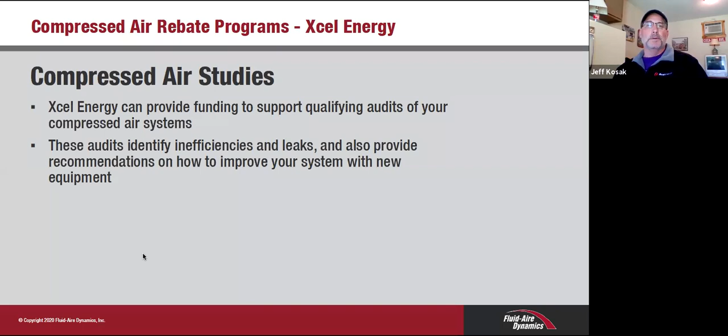Well, that's very helpful. Thanks for giving us a bit of background. Andrew, do you want to briefly introduce yourself and give a little background on what you do for Xcel? Yeah, I'm the engineer that works on the compressed air program. So I'll review all of the study contents and then create the custom rebate analyses. So we file those with the state so they can get audited. We're usually pretty accurate on those, and those are used to determine the KW savings that we'll rebate on for custom, and then also maintain all of the prescriptive rebates that we offer.

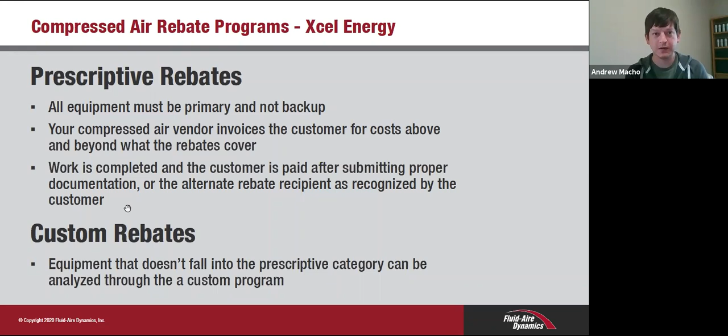Thanks for that. Yeah, you've been very helpful on some of the programs that we have worked together on to date. So looking forward to getting involved in some more of those going forward.

Just to touch on this slide here, there's two different programs available. We have the prescriptive rebates, and I'll let Jeff and Andrew give us some more detail on that in a minute. One of the big things on that is that all the equipment must be primary and not backup. So you can't get a rebate on a backup compressor. Is that correct, Jeff? Am I stating that correctly? That is correct. So that's what that means is if you use a compressor primarily or just only for backup, it's not your main compressor that's carrying the load, that would not qualify.

Your compressed air vendor invoices the customer for costs above and beyond what the rebates cover. So what that means is, in the case of Fluid-Aire, we're taking on the risk there on the prescriptive program. It would be deducted directly from what we charge you for the compressor upgrade. And then the work is completed and the customer is paid after submitting proper documentation, or the alternate, a rebate recipient is recognized by the customer. And then the custom rebates, that's for equipment that's over and above 50 horsepower. Anything 50 horsepower and up would fall into the custom rebate program. Anything more that you want to add to that, Jeff?

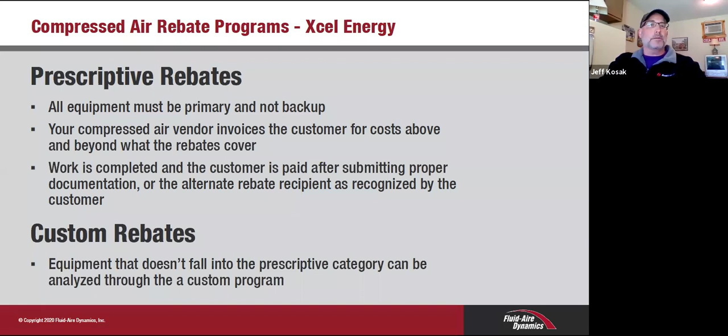Yeah, that's good. Thanks. That really helps clarify those two different programs.

Under the prescriptive program, there's the early retirement program for VSD compressors. If you have an existing fixed speed compressor, you can essentially get cash for that, which is a pretty cool program. There's $100 per horsepower, which applies to any VSD compressor under 50 horsepower, and on top of that, there's the $3,000 early retirement rebate. By retiring that existing compressor, meaning you take it out of service and document that it's been removed, you can get $3,000 towards the purchase of a new VSD compressor from Xcel.

Replacements of working in-service compressors with new factory compressors from 10 to 49 horsepower, so it's rounded up—any increments under that are rounded up to the next horsepower. The existing system must consist of a single rotary compressor unit serving on a common header. The existing compressor may be equal to or greater than 20 horsepower higher than the replacement compressor. Piston compressors are not eligible—so if you've got an older reciprocating type compressor, that does not qualify.

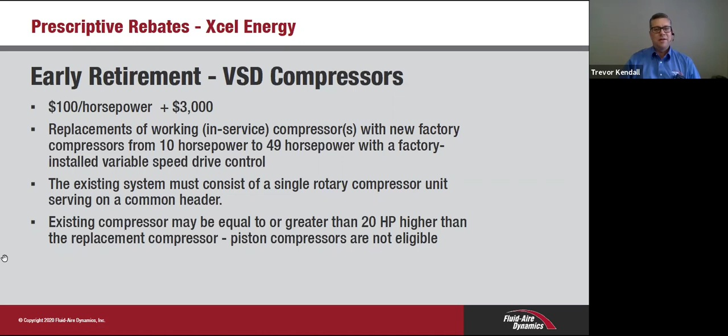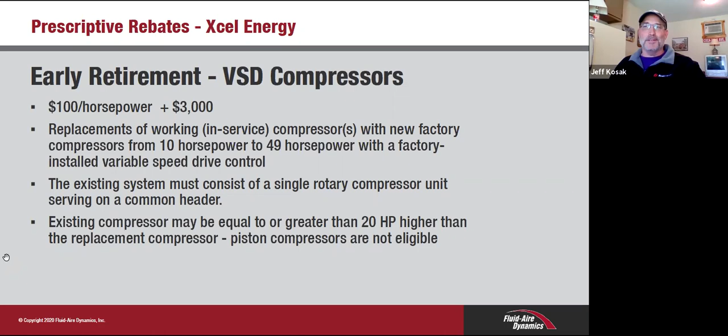Jeff, you could probably speak a little bit more to that, what's entailed there. I'm going to hand the baton over to Andrew on that one. He's got probably a little more control over that part.

On this early retirement and the horsepower reduction, that $3,000 bonus just has pretty specific requirements on the equipment in place—that it is pretty inefficient and there will be a large amount of savings seen from upgrading. Otherwise, it's just the standard $100 per horsepower, which is a new comparison saying you have these two options, but you're going with the VSD option.

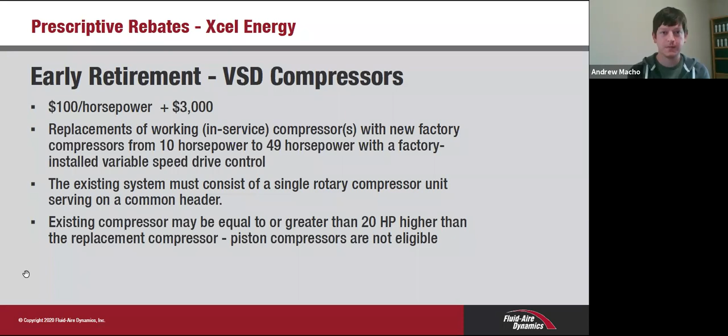Thanks for that, Andrew. I think we can move on to the next slide, Mike.

There are two ways to be eligible for the early retirement rebate. You must either have an existing load, unload, or online, offline compressor with less than or equal to 2 gallons of receiver storage per CFM of compressor capacity, or an existing inlet modulation with or without blowdown control, and those are being replaced by newer, more efficient equipment. The horsepower reduction rebate will require documented removal of the compressor, as I mentioned before.

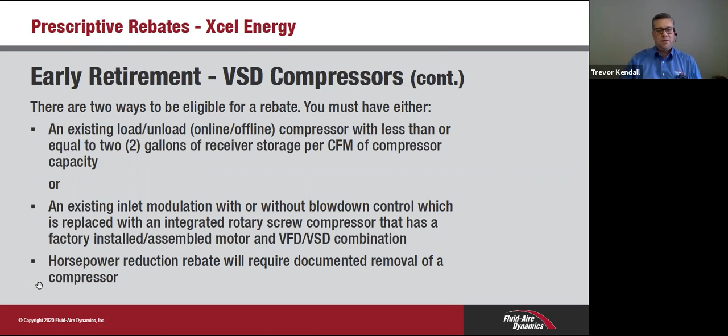The new VSD compressors—restating here—$100 per horsepower for compressors under 50 horsepower. So an example: if you've got an existing 25 horsepower fixed speed rotary, and you replace that with a 20 horsepower VSD, you'd get $2,000 off the price of the compressor, and we collect that directly from Xcel. In addition, you'd be able to retire that old machine if you're not keeping it as a backup, so you get another $3,000 for the retirement if you're doing that. If you don't have an existing fixed speed, then it would just be the $2,000 for the 20 horsepower. It's just a little case example. It must be a new compressor with a factory integrated variable speed drive. We've got some examples of the different common horsepowers, and compressors outside that threshold round up to the next lowest level.

You can go on to the next slide, Mike.

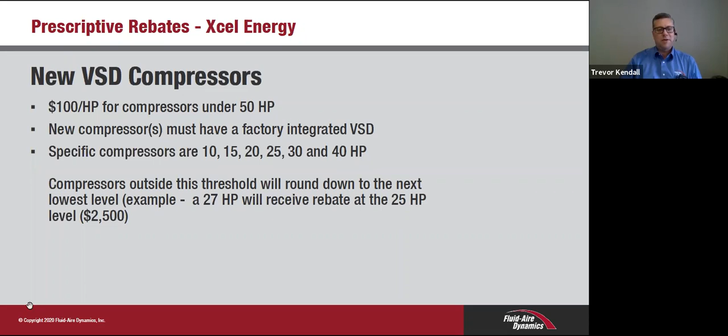Benefits of variable speed drive technology—this is something I'd like to bring in Brad on. Brad's had a lot of experience. How long have you been with Fluid-Aire, Brad?

Well, the joke around here is I've been doing it since I've been in diapers, but since high school, which makes it 22 years, I guess.

Just a couple points on what's just been discussed. Firstly, the incentive rate of $100 per horsepower and then the $3,000 for early retirement. It's one of the most generous programs we've seen in the three markets we serve here: Chicago, Milwaukee, and Minneapolis. So take advantage of it.

Here in Chicago, we get $85 per horsepower with no early retirement. The Milwaukee market offers $45 per horsepower. So very, very generous what Xcel is offering here.

So the question we often get asked when we mention variable speed drive or recommend that a customer install at least one on their system is what the benefits are. There's several benefits. Firstly, obviously the energy saving side.

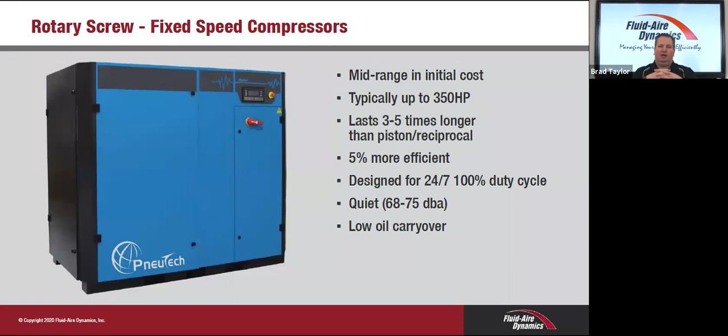The way the incentives work compared to some other regions is it's demand reduction for the Minneapolis market, which means that if I can eliminate the inrush on startup, or the plant startup first thing in the morning, if I can lower that with a variable speed drive, that's one area. Obviously the continuous demand is a kWh savings that's forever part of the history of having a VFD installed.

Other advantages include reduction of noise, longevity of motor bearings or air end life, and reduced heat. Those are some of the advantages. When you consider the inefficiency of compressed air being only 10 to 12% efficient, a majority of that is heat. By only delivering the exact amount of energy into the package to match the output demand of the system, that's where we get our efficiencies.

So the inefficiencies are through a couple basic control modes, which were just previously mentioned: load, unload, and modulation. Load/unload is probably the most common. It's been around for decades. Unlike a piston compressor, or a compressor up to 10, maybe 15 horsepower, where you can operate it through a pressure switch that starts and stops the compressor.

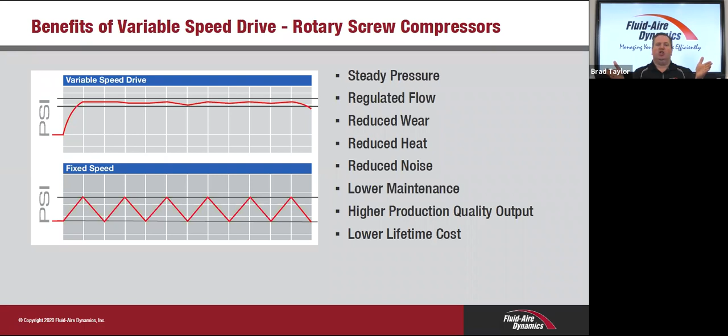What happens though is that the compression ratio between the modified inlet, if you will, and the discharge greatly increases. When that happens, there's an immense amount more horsepower or kilowatt required to produce that compressed air. So below 80%, the efficiency of a compressor in modulation mode drastically changes. A better way to modulate, or maintain a constant pressure while varying the flow, is by utilizing variable speed technology.

That's the short of it, Trevor.

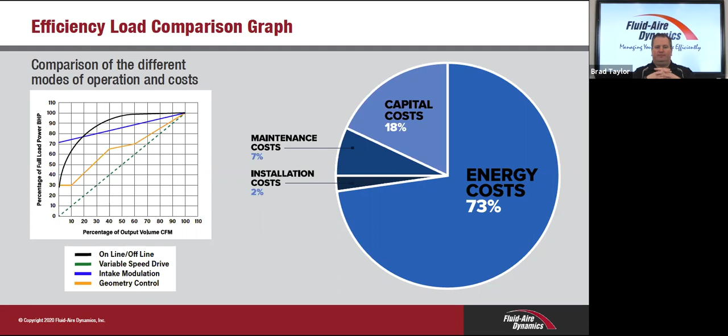Thanks for that, Brad. That's a very in-depth overview. Mike, do you want to move on there?

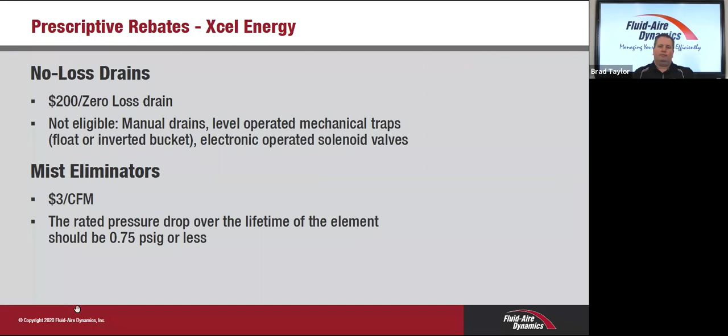Okay, good. So a couple other items that Xcel offers rebates on are the no-loss air drains. Essentially how that works is it doesn't bleed off air, it only bleeds off water. There's a float and a sump. Once the sump fills up with water, it automatically opens the drain and empties out the water that's in the drain. Very efficient, and there's some very reliable zero loss drains out there.

Xcel is offering a rebate that covers roughly two-thirds of the cost of the actual drain. As for the mist eliminators, Jeff or Andrew, do you want to speak a little bit about what's involved with those?

Yeah, the mist eliminators we rebate on—there's a reduced pressure drop which is what we base our energy savings on, but there are other benefits like not changing filters as often and better filtration. Also, regarding the no-loss air drain, it's good to submit the labor cost with that, because otherwise rebates get capped at 60% of the cost we receive. So if the labor cost to install isn't submitted with it, it might get capped below the $200.

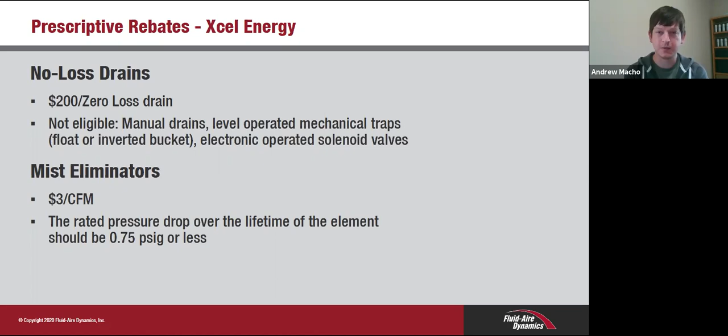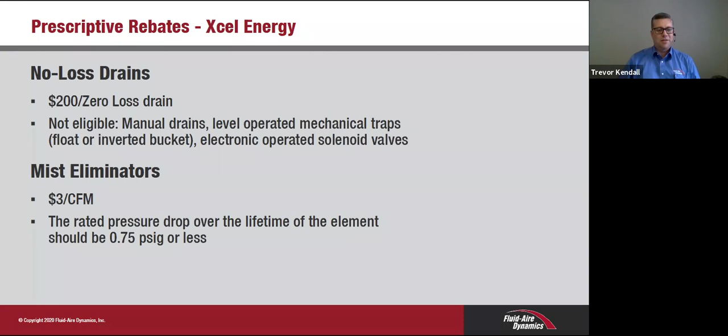And then just to touch on cycling refrigerated dryers—if you're installing a dryer, it's good to consider whether it's going to be beneficial or not to do a cycling style dryer. There's several different types of those on the market. Brad, do you want to speak a little bit to the detail of what's involved with the different dryers?

Yeah, sure. So typically we dry our compressed air with two different types of dryers, either refrigerated or desiccant. We'll talk about conserving energy on desiccant dryers in another slide, but specifically about refrigerated dryers, there's three different types. You have your non-cycling, which is essentially a refrigeration circuit that constantly runs, and we bypass a bit of the hot gas into the cold side to regulate or maintain the dew point between 38 and 42 degrees. Again, it's very wasteful because we're using expensive energy to compress the Freon gas, only to bypass some of it to maintain the temperature. It's very typical to see this type of dryer up to 200 CFM.

After that point we have options, two of which you just mentioned: cycling type and variable speed drive. The cycling type uses a thermal mass, whether it's ice or a chilled glycol solution in a large tank, or could be some type of sand or a block of aluminum. All of these create a mass that's refrigerated down to just below or just above freezing—32, 31, 33 degrees—depending on how much oil's in the compressed air. It will actually turn off and allow that thermal mass to heat up until the set point, typically about 42 degrees. So much like your refrigerator at home, there are energy savings from having that refrigerant circuit off when it's not needed. It also gives energy savings in the evening hours when the system isn't running.

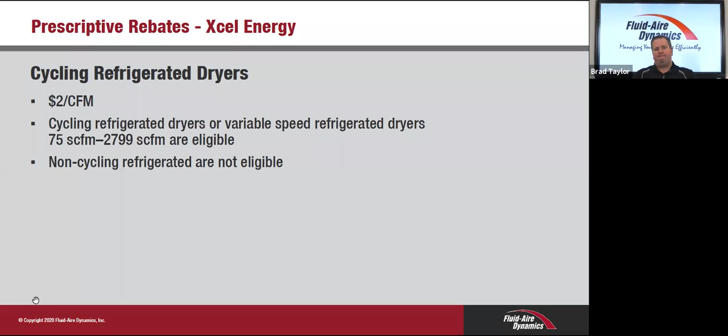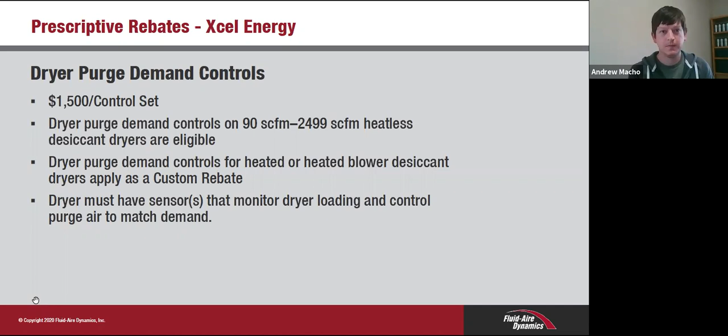That's so good. Think of demand purge controls as making your dumb desiccant dryer smart. Most desiccant dryers, especially under 200 CFM or arguably even 400 CFM, simply come with a timer, a valve switching control timer. It doesn't care how dry your compressed air is—it just cycles those towers typically every 10 minutes, or whatever the timer is set for. Usually, demand controls are an option at the time of purchase. Yes, they're costly, typically anywhere from $3,000 to $5,000 for the control. A large portion of that cost is in the hygrometer itself, which requires calibration.

But consider the cost of operating a desiccant dryer. Compressed air at 10 cents per kilowatt costs about $45 per CFM to produce per shift, annually. For 2 shifts, multiply times 2; for 3 shifts, times 3. If you're 24/7, multiply that times 4.2.

When you take that and multiply it times the demand of a desiccant dryer, which is typically about 15% of the capacity, not what you use, but of the capacity of the dryer, it adds up to tens of thousands of dollars in many instances. So when you look at the balance of adding some more complex controls that are going to save a lot of energy, that are incentivized by Xcel, it really makes the case a no-brainer.

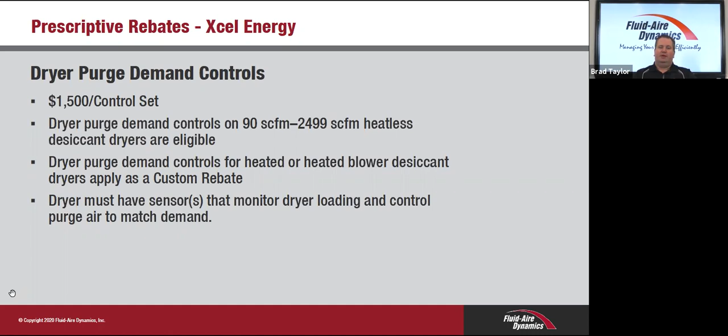When you get above 400 CFM, typically it's standard. The plants are savvy enough and have an understanding. But we're bringing this to potentially smaller operators that need to know this information so they can make educated decisions the next time they purchase or want to retrofit their controls, which is very easy to do, which we could discuss offline in a phone conversation or on-site review.

Thanks for that, Brad. That was very helpful for me as well, just to get a better in-depth understanding of how that can save money.

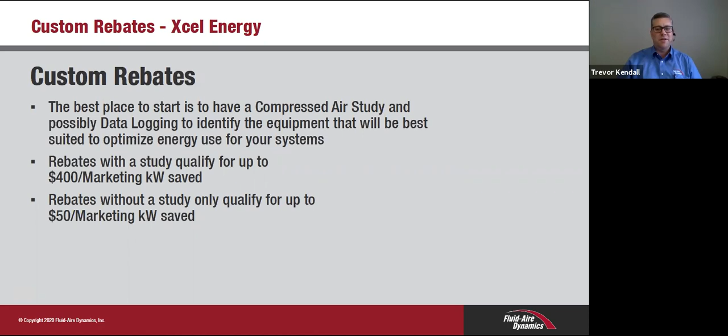The custom rebates, I'm going to draw on Andrew for this as well, but I think I just want to emphasize that the best place to start on these is to have a compressed air study, which is something that needs to be done through Xcel Energy on the front end, and possibly do data logging as part of that study to identify what equipment's going to best be suited to optimize your energy use.

Andrew, do you want to fill in on this and give some depth to it? Yeah, so the studies that are generally required by this, as you can see, we give $400 per marketing KW saved. And the marketing KW is essentially what we come up with as the max KW saved or an average KW saved over the operation of the new equipment.

It's $400 instead of the $50. So we really try to get everyone to do those studies so they get that full $400 and really drive towards that. And in that study that we fund, we do require the data logging of at least 7 days, and at least on systems that are 50 horsepower or more.

And there will be a lot of energy conservation measures recommended within that. And we require leaks to be identified and those leaks to be fixed. And that helps us be able to fund those studies. And it's all in the application of all requirements and what would be included in those compressed air studies.

But really, once we have that study in place, it essentially really gets you an idea of what those custom rebates are going to be. And then after that, you would submit that custom project and get your pre-approved rebate amount. But usually those energy conservation measures within those studies are pretty accurate unless loads change.

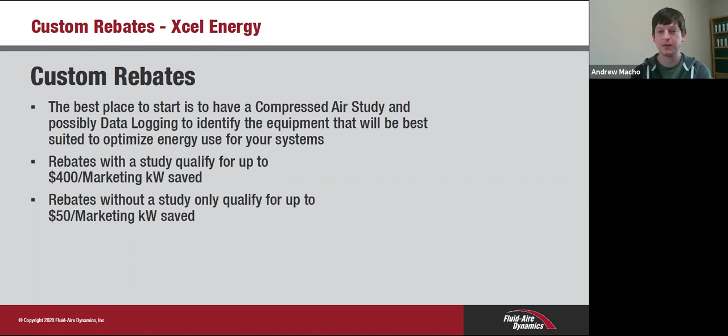It could be a few different ways to get to that average KW, but we try to find that max and maximize that rebate. So that's why we kind of call it the marketing KW, it's not any specific KW that's saved. It could be a multitude of ways we arrive at it. I see, thank you.

I think we can move on to the next slide, Mike.

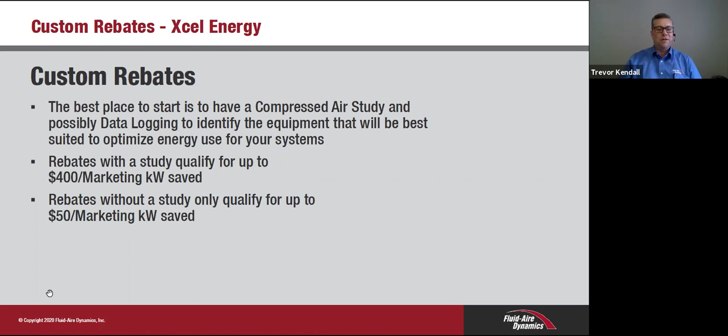So if you're looking as to how to participate, we'll help you through this whole process, and Xcel will be a big resource as well, obviously. But you want to clearly document the proposed equipment and technology specs, and then work with whoever your compressed air vendor will be, and complete the custom efficiency workbook.

And then we'll be able to help you complete the whole application process. There's not a lot to it on the prescriptive program. In fact, we do all of it kind of behind the scenes. So not a lot of involvement on your part there, but on the custom rebate program, there's a bit more to fill out.

And then once that's been approved, the project is completed, Xcel Energy will verify those energy savings, and it'll be paid out upon the completion. Andrew, anything that needs to get clarified there?

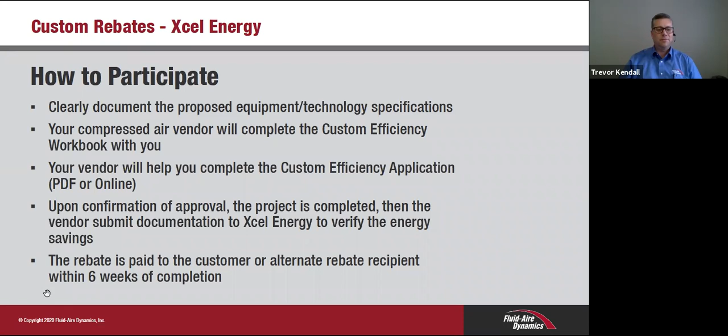I think that pretty much covers it. Okay, good. We can move on to the next one.

So how to qualify: you must be a real retail rate paying electric and/or natural gas business customer of Xcel Energy. For the prescriptive rebates, you can just provide an invoice from Xcel Energy that was within 12 months of the purchase date. For custom rebates, you need to do that before you actually order the equipment. Pretty straightforward, but just want to make that clear for everyone.

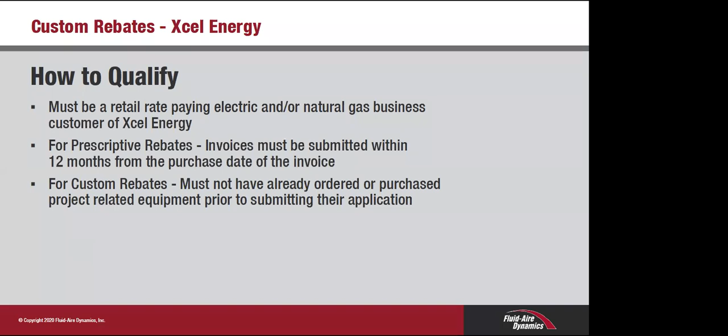So Trevor, you mentioned on the prescriptive rebates that the invoice is not from Xcel. The invoice must be for the equipment or the service that's being provided, and then that is submitted to Xcel for rebate. Is that correct?

Well, on the prescriptive ones, we actually take that off of the purchase price of the compressor and then work with Xcel directly on that application and get payment from Xcel, so the customer never ends up paying what the rebate amount is. Does that help clarify it, Mike? I think so, yes. Thank you. No problem.

Yeah, and just to note too on that, the 12 months - we understand in many situations customers are purchasing prescriptive components and there's other things that may follow, so we do allow that 12 months. As Andrew mentioned earlier, you purchase a piece of equipment and perhaps 9 months down the road you find an opportunity to do a physical install. So the 12-month leeway is for that purpose. But at the end of the day, once the project is operational and the application is submitted with the invoicing, all the invoices that become part of that project need to be within that 12-month window, just to clarify. And that would include physical labor that might be performed by the company installers themselves. As long as it's noted, we can use that as part of the basis cost to allow for the full rebate, so it doesn't cap at that 60%.

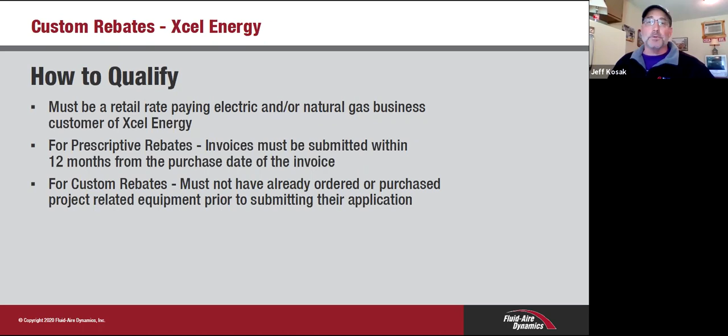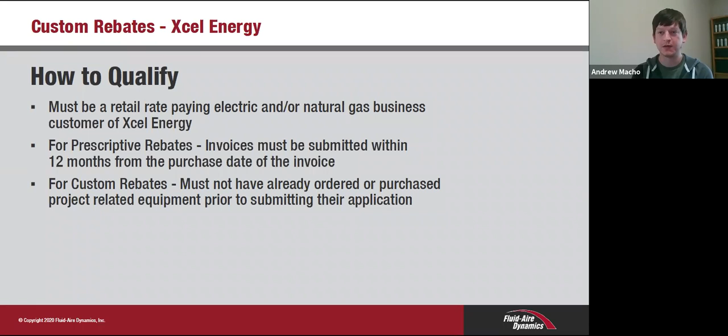That's helpful, Jeff, thanks for bringing that in. And also regarding the prescriptive process you mentioned, it does require the alternate rebate recipient, which was mentioned earlier, to be filled out, so it directs where that rebate goes. Because normally without that filled out, it does go to the customer. But if that's taken off of the upfront, then it'll need to be filled out that way. That's a good point.

Should we move on to the next? There we go.

The master system control is another component to that. Some of you may have heard of the term cascading or pressure cascading, and that's where you're trying to match compressor ranges within another compressor's pressure range. And what you end up with is a pressure range that's, rather than 5 or 10 psi, if you have 3 or 4 compressors, the pressure band can be upwards of 25 or 30 psi. Well, that potentially means that you could be overpressurizing your system by 25 psi or whatever it is. Typical pressure bands don't need to be much more than 10 psi if we have low pressure drop filters and a sequencer controller. We add a variable speed drive component to that, we can tighten up even closer.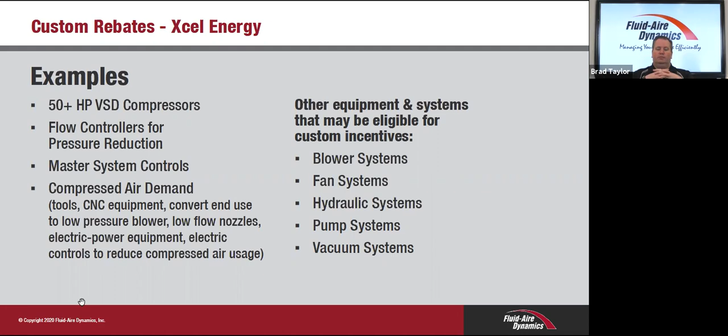Thanks for that, Brad. That helps understand what the real benefit is of going through these rebate programs.

There's other equipment and systems that may be eligible for custom incentives. Just to touch on those briefly, you might have a blower system for drying off parts or some other process in the facility. Fan systems, hydraulic systems, pump systems, and vacuum systems. Often those are tied in with processes that use compressed air. So good to note those points.

Trevor, just to note as well, in the previous slide, Michael, if you could just step back one for a second. When we talk about other equipment and systems that might be eligible for custom incentives, that's very true. Additionally, where we offer funding for compressed air studies, we also offer funding for compressed air demand. I think a lot of these systems fall into that demand side of compressed air. If not individually, as they are set up as a system, we can offer demand studies where it's not defined here, but we do offer potentially 75% of the study cost, not to exceed $25,000.

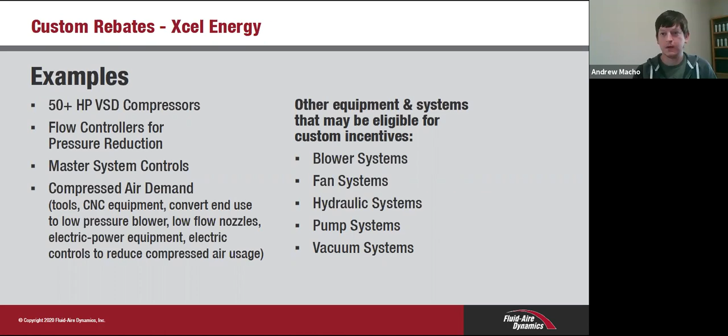Yeah, correct. And again, it depends on the intricacies of the system itself. If it's pretty complex, where it really needs more of a deeper dive approach to really understanding what's happening and what the solution might be to resolve it, to add efficiency to it.

That's where an additional study, a demand side type study or an engineering study could come into play. And as a result of that, the defined opportunity would be identified. At that point, we would start to review that through the custom efficiency program. So it's a different funding strategy than the compressed air study, but it allows for more of that in-depth look if a customer has that need to review their entire system beyond just compressed air.

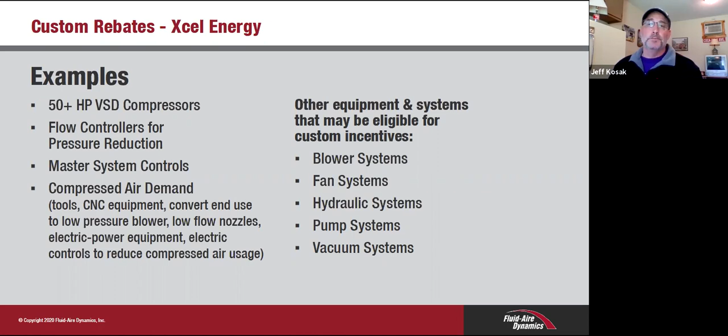Okay, great. I don't know if that helps me understand better.

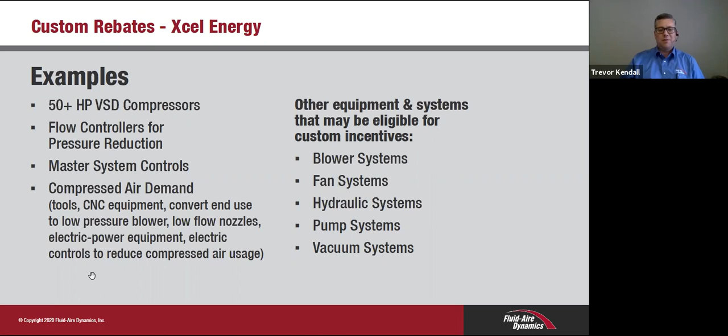Mike, how are we doing for time? We're doing well. We don't have any questions at this point from our attendees. And I am reaching out. I want to see if you guys maybe want to cover data logging and just talk about that and what that brings to the table.

I don't know if that's worth it, but in the meantime, I've got a question for the Xcel Energy folks, and that is that we do a lot of leak detection and repair in the Chicagoland market with the ComEd programs, and I'm wondering where leak detection and repair falls into your offerings there. So I wondered if Jeff or Andrew might be able to explain that to us a little bit.

Yeah, and that's with the compressed air study we mentioned at the beginning. That's considered the supply side, and we fund up to 100% of that within the designated guidelines, which is on the application for funding. That has the leak detection and the leak fixes within it, and that's where we would claim those. And if there's additional leaks found afterwards, we can do those supply side compressed air studies every 5 years for a customer.

And if within those 5 years there's another leak test done and there are different leaks and you fix those, we can also claim those. We don't specifically offer rebates on those leak fixes unless there's a large capital cost that would push the payback longer than 9 months. Usually the leak fixes are a pretty fast payback, and they'll pay back much quicker than 9 months.

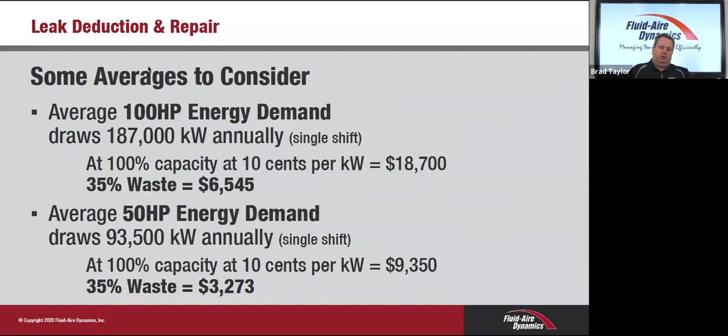And that's very, very true. Even with the 22 years that I have in this industry, I still go in armed with a set of data loggers, because none of us know how the dynamics of that system look until we put some loggers on there and measure a minimum, in my opinion, every 5 seconds.

It reveals quite a bit when you look at data logging. It reveals your peak events, of course. It'll show what your average flows are. It'll show whether additional storage could help bring down those peaks or the peak average.

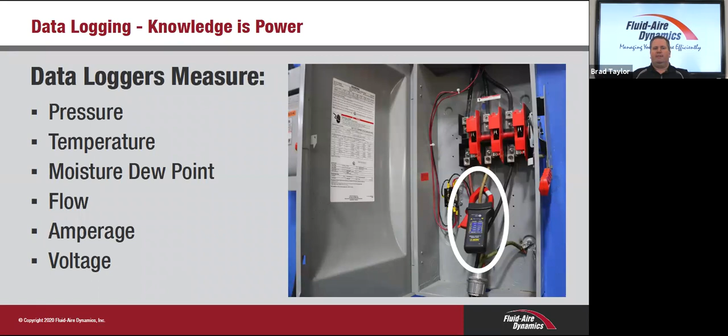The Department of Energy tells us that they see an average of 35% leakage. We have verified that many, many times and typically see between 25 and 50% leakage, and sometimes we see upwards of 70.

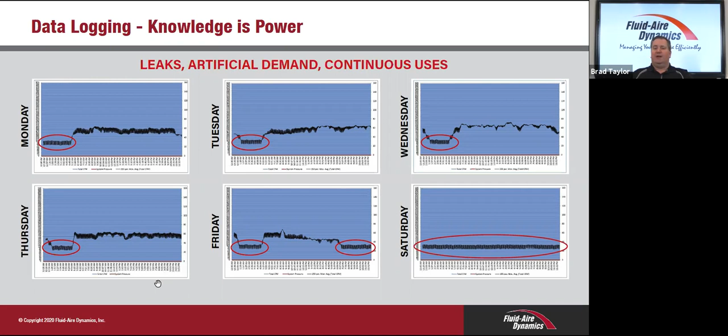The biggest offender to that is dust collectors. Those pulse valves that are outdoors - cold winter day, nobody wants to go out and inspect them. They freeze up, diaphragms tear or chip, and boom, you've got 200 CFM of compressed air blasting inside of a baghouse that no one hears, and yet people are wondering where the pressure's going.

So I'm really glad to hear of the program through Xcel for leak repair. It's so imperative that there is a leak repair program within every organization. And if you don't, ask your compressed air provider, hopefully that's us, to help you with that, or even train your staff as to how to do it. Or in some instances, we'll do the identification using our ultrasonic meters and tally up and tag those leaks for your own staff to repair.

That's something that data logging shows, but it'll also show you what energy could be conserved by using different types of technology, whether it's turn valve type compressors or variable speed drive, or maybe a smaller base load compressor to eliminate its unload time. It could also help us identify what your continuous load is on desiccant dryers, how much that's consuming.

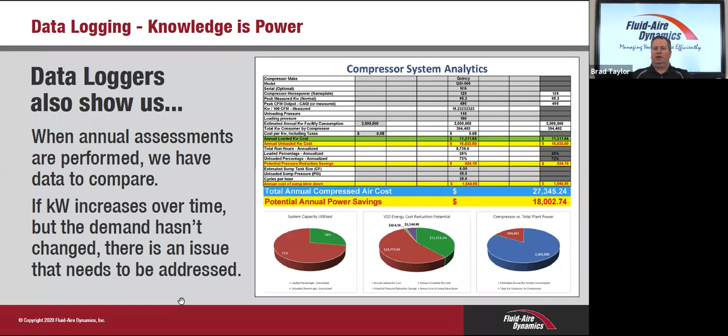So we've added a component to this measuring, and we now say you can't continuously manage what you don't continuously measure. We're just in testing now of a device that you'll be able to put on every one of your compressors that will tally up on a homepage and show you what your compressed air demand is, what the efficiency of your system is, what the last 24 hours leak rate was, but it'll also help your maintenance staff understand if there's any potential heat-related shutdowns, motor bearing temperatures, things of that nature. Very powerful tool that allows you to keep on top and set thresholds for alarms that you can manage your system with. So stay tuned.

Very good. Well, we don't have any other questions from the audience. Is there anything anybody from the panel would like to add to this before we move on with our days?